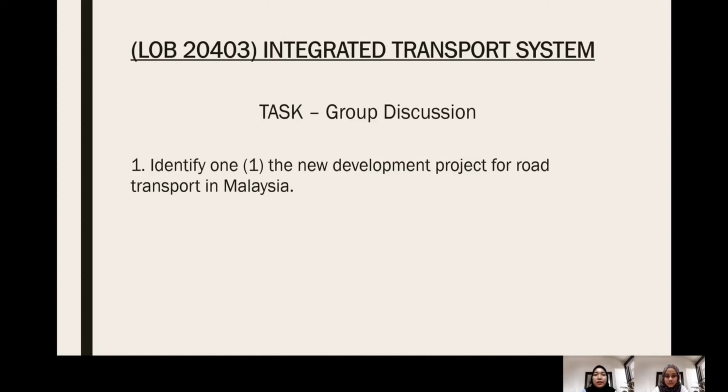For question 1, identify one new development project for road transport in Malaysia. We decided to choose Damansara Shah Alam Elevated Expressway, or DASH.

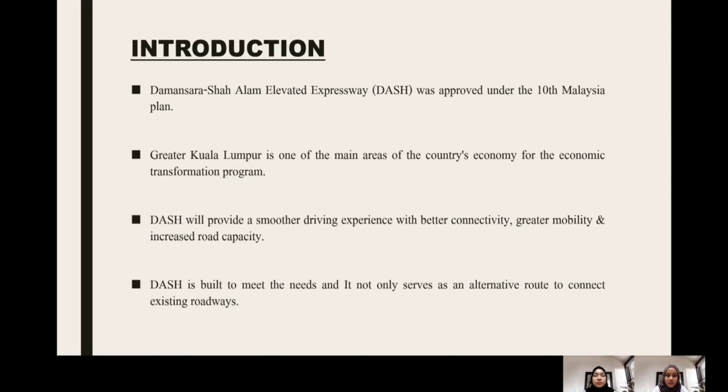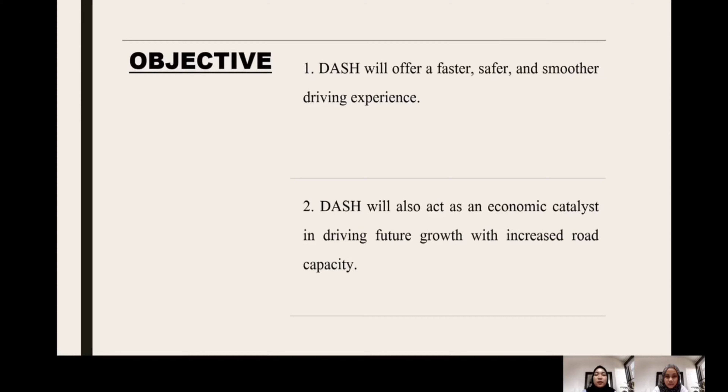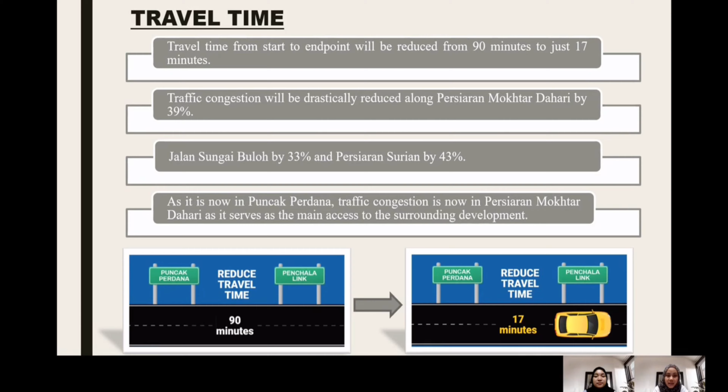Next, Nur Shazwani will explain about the travel time. The travel time from start to end point will be reduced from 90 minutes to just 17 minutes. Traffic congestion will be drastically reduced along Persiaran Mokhtar Dahari by 39%, Jalan Sungai Buloh by 33%, and Persiaran Surian by 43%. Currently in Puncak Perdana, traffic congestion is high in Persiaran Mokhtar Dahari as it serves as the main access to the surrounding development.

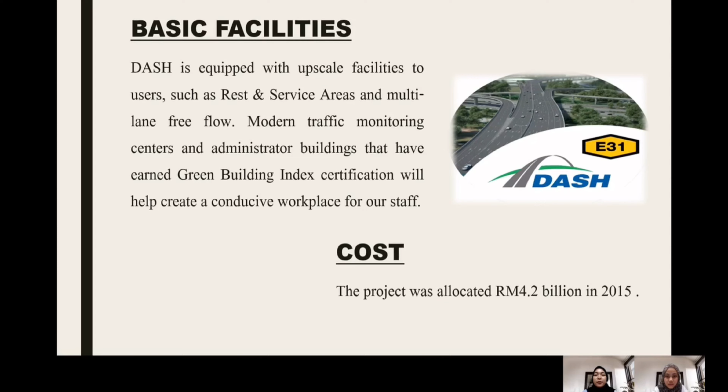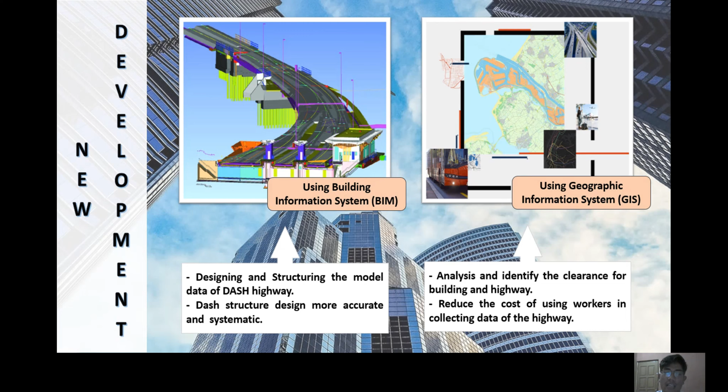By using GIS, they can analyse and identify the clearance for buildings and the highway. It also reduces the cost of using workers to collect data on the highway. By using this system, the DASH project will run smoothly, showing that this is the new development that must be used in our country nowadays.

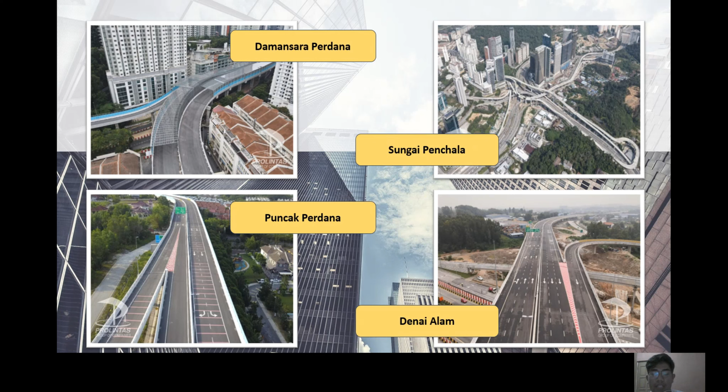Next, as you can see here, this is the picture of the DASH project, which uses BIM and GIS. As you can see here, the Damansara Perdana, Puncak Perdana, Sungai Penchala and Denai Alam. This shows that by using the new development, it will produce a better and excellent design and result for the project.

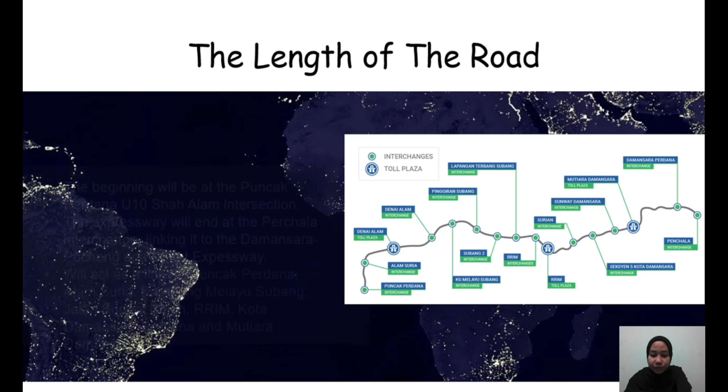Today I will be presenting about the characteristics of Damansara Shah Alam Elevated Expressway, or DASH. The purpose of DASH is planned to provide an east-west corridor link between the areas of Shah Alam, Batu Arang, Guthrie Highway and Damansara Kuala Lumpur. This highway is envisioned to facilitate a vital east-west corridor link between the regions of Shah Alam, Guthrie, Sungai Buloh and Damansara. In terms of characteristics, I will explain the length of the road first.

The beginning will be at the Puncak Perdana U10 Shah Alam intersection. Here I already provide the photo of the map. This is the Puncak Perdana interchange, the beginning of the road, and the expressway will end at the Penchala interchange, linking it to the Damansara-Puchong and Sprint Expressway.

So from here, Puncak Perdana interchange, and this is the end of the road, Penchala interchange. This road also will act as a link for Puncak Perdana, Alam Suria, Kampung Melayu Subang, Jalan Sungai Buloh, RRIM, Kota Damansara Perdana, and Mutiara Damansara.

Dash will complete the Kelang Valley Highway, namely the Penchala Link, Duta Ulu Kelang Highway, Sungai Besi Ulu Kelang Elevated Highway, Shah Alam Highway, Kemuning Shah Alam Highway, Federal Highway and the Guthrie Corridor Expressway. This project also intended for providing easy access to Persiaran Matahari, Guthrie Corridor Highway, Jalan Sungai Buloh, Airport Road, Persiaran Surian, New Kelang Valley Highway, Damansara Puchong Highway, and lastly Penchala Link.

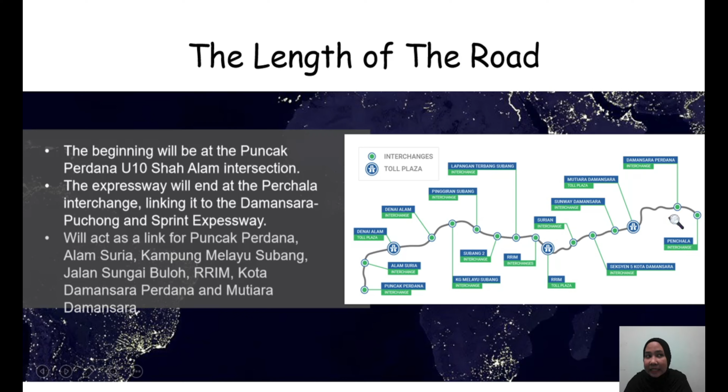For the characteristic of the road, Dash has 20.1 kilometer of length in total, and it has 13 interchanges, like I already showed in this map. It starts from Puncak Perdana interchange and continues with Alam Suria interchange and Denai Alam interchange, Kampung Melayu Subang, and so on until Penchala interchange, the end of the road. So in total, it has 13 interchanges.

Moving on to the next point, this road also has a modern traffic monitoring center and administrator building that have earned Green Building Index certification. Last but not least, this road has 3 toll plazas, starting from Denai Alam, continuing with RRIM, and ending with Mutiara Damansara Toll Plaza.

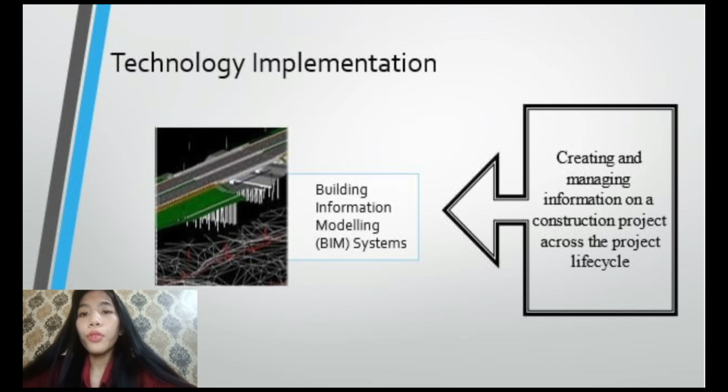Building Information Modeling, or BIM, is a process for creating and managing information on a construction project across the project life cycle. One of the key outputs of this process is the Building Information Model. The government has taken a bold step in terms of technology. The partners involved in delivering the project are using some of the latest Building Information Modeling, BIM, systems. These are being used not only for planning, design, or construction, but will also be used in the future for operation and maintenance aspects.

Construction of toll. Electronic toll collection is a wireless system that automatically collects the usage fee or toll charge from vehicles using toll roads, HOV lanes, toll bridges, and toll tunnels. It is a faster alternative which is replacing toll booths, where vehicles must stop and the driver manually pays the toll with cash or card.

In most systems, vehicles using the system are equipped with an automatic radio transponder device. When the vehicle passes a roadside toll reader device, a radio signal from the reader triggers the transponder, which transmits back an identification number that registers the vehicle's use of the roads, and an electronic payment system charges the user the toll.

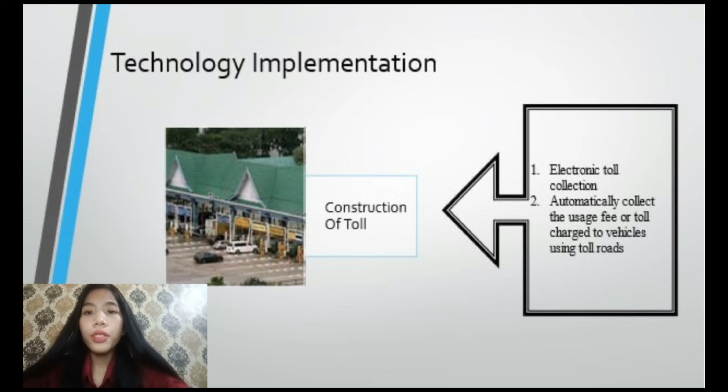Construction works in Malaysia are implemented mainly by the federal government and state government. However, since mid-1980s, construction of toll roads has been started by private companies who were then authorized by the government to charge toll to road users. This road is an alternative to the existing road network and is built with various facilities provided to users.